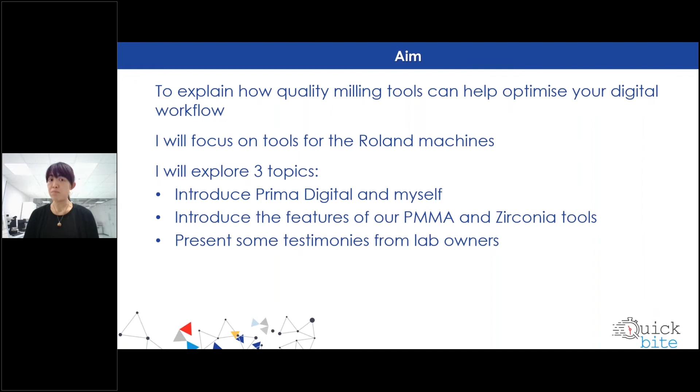This is only possible because we invest, especially in technology. In 2018, we built ourselves a new factory, and in no time, the factory is actually filled. I'm now today in the new factory. Our R&D facility, I'll show you later on when we finish this presentation, the facilities that we are in today.

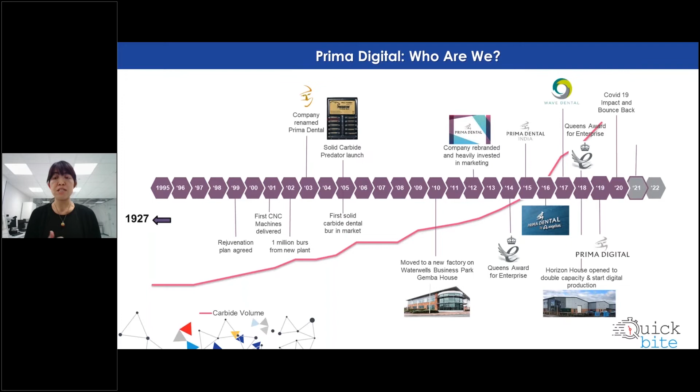This is myself, just a brief one. I completed a PhD in a UK university from the Engineering and Computer Science department. Then the very first job that I had was to lecture at the university. One of the topics that I lectured was machining.

Then I left academia and joined an engineering company. If you Google Sandvik, you will find this is a massive engineering company. There are many divisions, many companies under the headings of Sandvik. I was there designing tools in that division, and also I joined another division designing carbide. Now, we know carbide is a substrate of tool, therefore they are both related. So this knowledge has actually given me a lot of advantages joining Prima Dental.

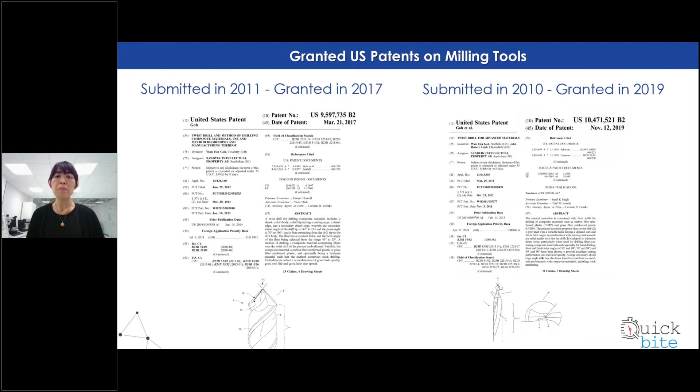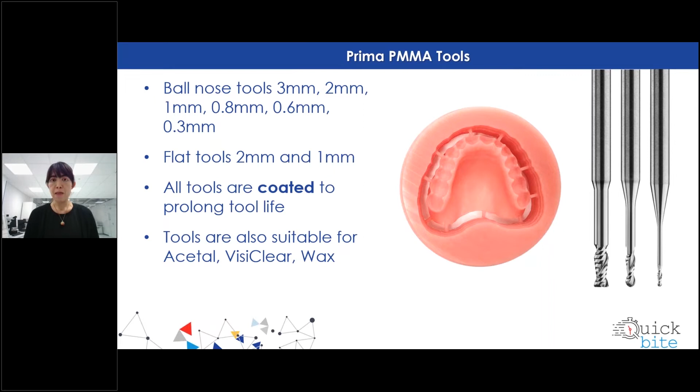When I was designing these PMMA tools, I was trying to gather information from the marketplace to see what we need to consider in this particular product. I can summarize it in 2 points. One, people say milling PMMA is very long. The other one, people were saying that vibration that they see when they're milling PMMA, especially in the desktop machine. We're talking about desktop machine here.

So when we design this tool, we look into the first issue, which is long milling time. Milling is the operation of removing materials. So you mill, you get rid of materials. Now 3D printing is adding materials, so there are 2 completely different operations, just to give you a contrast. In order to mill fast, sometimes it's cut fast, so we have to remove material fast. Now the way to remove fast is to rough the material out fast. So the roughing tool that you normally see in the marketplace is a 3mm toric tool.

And that's how we designed that 3mm toric tool to remove material fast. I'll explain later on how this is achieved. In order to address the issue of vibration, we also put into the 3mm tool certain features that can help minimize the vibrations. We also considered that this tool is used for the desktop machine. Of course you can use it on a large milling center, but it's designed so that it can reduce vibration in the desktop machine.

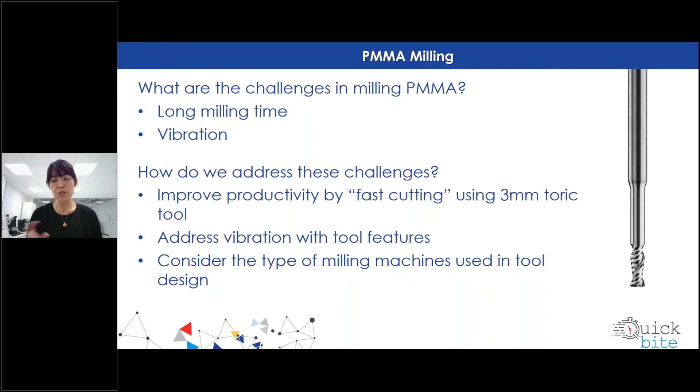So what is so special about this milling tool? If you look into tools in the marketplace, you can normally get a 1 flute tool for PMMA cutting. We have 2 flutes because we realized that when you put a 2 flute tool into the desktop machine - here in what we call a Roland machine - you can see the vibration cease. Compare it with 1 flute and you can see the difference yourself. Also, the 2 flute tool allows you to mill faster. I'll explain that in a minute.

We also treat our 2 flute tool, and also any other tools that we have for PMMA, on the edge because of the vibration that we get. So we treated the edge to make sure there's no chipping. We also put a coating on the tool for the benefit of long life - that is for the benefit of the end user.

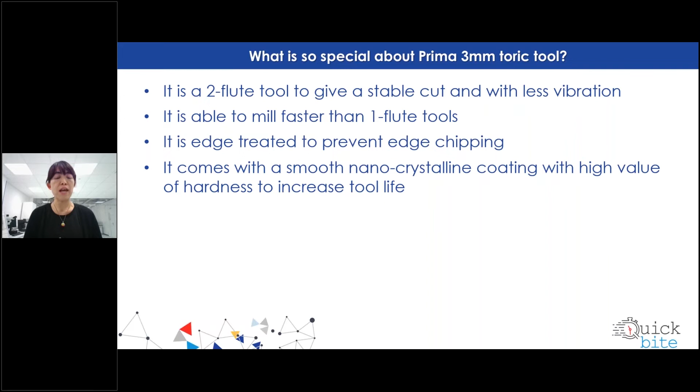Now we're talking about the tools milling fast. What does it mean? Suppose you go running today - if you want to reach a destination fast, what do you do? You run faster, of course you do. Likewise, you put it into milling tools - if you want to cut faster, what do you do? You feed faster. That normally comes to our mind, isn't it?

Suppose we go back to the running example. One thing you can do in running is take a big step. For people who are tall with long legs, you can take a big step. For people like me who are short, I can only take a small step. Maybe I can run fast but with small steps. Some people can run fast with big steps, right?

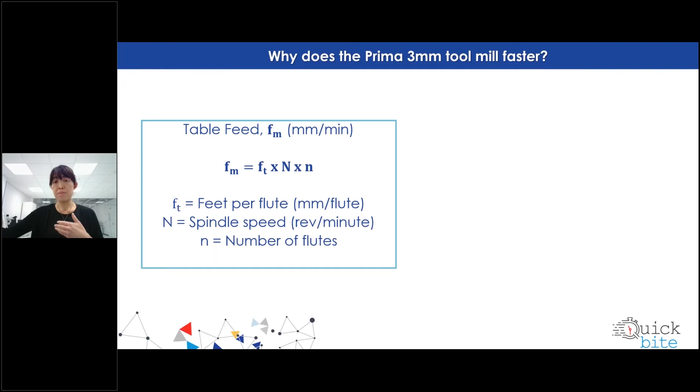So put it into milling similarly - we say milling is a material removal operation. The faster you remove material, which is the removal rate, the better it is. So if you're taking a bigger step, in engineering terms we call that depth of cut. You can do it in the horizontal direction, which is radial depth of cut, or in the vertical direction, which is axial depth of cut. A bigger step helps you finish your job quicker, mill off quicker, and go home faster, right? So material removal rate has 3 elements again.

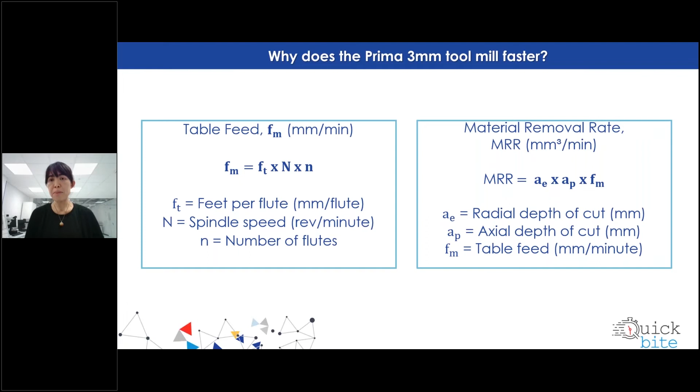The feed rate is only one of them. I'm not sure whether you've had the experience where you increase your feed rate, but when you look at the clock, the time isn't reducing. So you're thinking, okay, I'm actually feeding faster, but it's not reducing time, because there's more than one element within material removal rate. That's how we make use of the 3 elements to get our tools to mill faster - the depth of cut and the feed rate. We're not going into details of how we get these numbers, but this is how we allow our 3mm tool to mill faster.

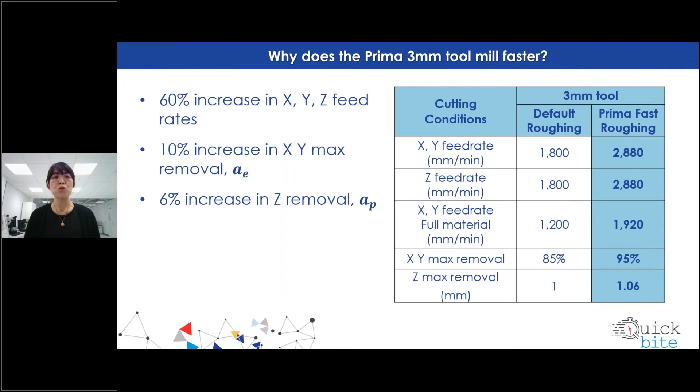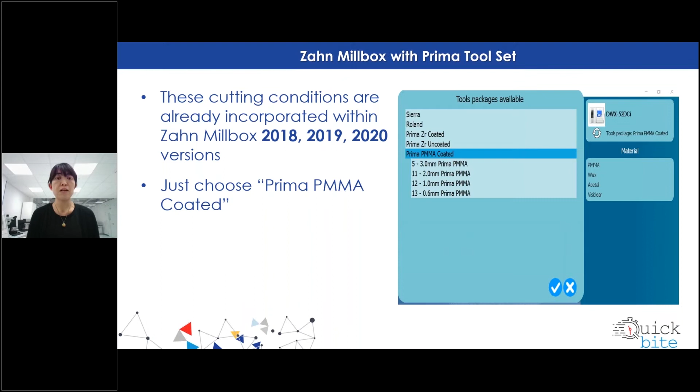If you are a Zahn customer, good news for you. These are already incorporated within the Zahn Millbox, so you don't need to remember what it is. If you have a Millbox, either the older version or the newer version, you just need to click under the tool package, and at the drop down, choose Prima tool. As simple as that. Very easy, no complication.

So what do we do to give an example of what it means by reducing time? We mill some bridges in here. I use a default cutting condition using our tool, so we milled it slower, and then we milled it fast also with improved cutting condition. The time is reduced by 17%, that is about 7 minutes. Now that 7 minutes would allow me to mill another bridge. So that is a time saving that you have here.

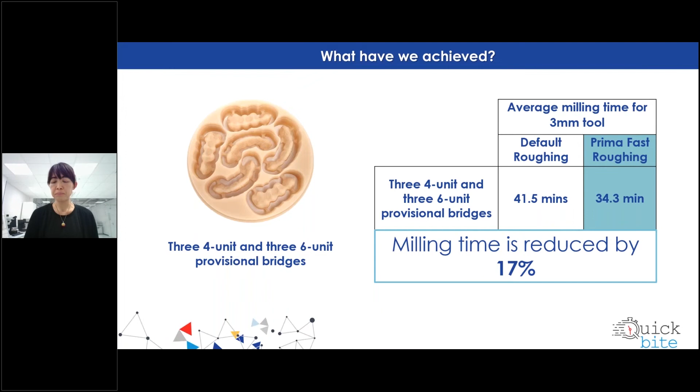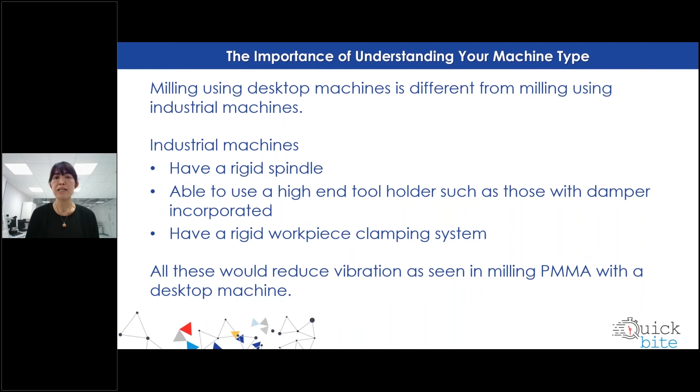We talk about understanding your machine being important because of the vibration. If I have to design this tool for a large milling machine, for example Haas in the US is very common, or DMG Mori Seiki, I would have designed the tool differently, because these will have a precision spindle, a holder that you can buy with a damper inside, so it reduces vibration and so on. So the tool can be designed differently. But this tool we have in mind is used a lot in the desktop machine, so we designed it to allow less vibration in the cut.

Why is vibration an important issue then? Because this is what you will see. If you take one of the tools in the marketplace, milled it 4 hours, you can see chipping on the edge already because of the vibration. So milling PMMA is not easy, I must say. So we design our tools, it goes up to 6 hours and it's still fine.

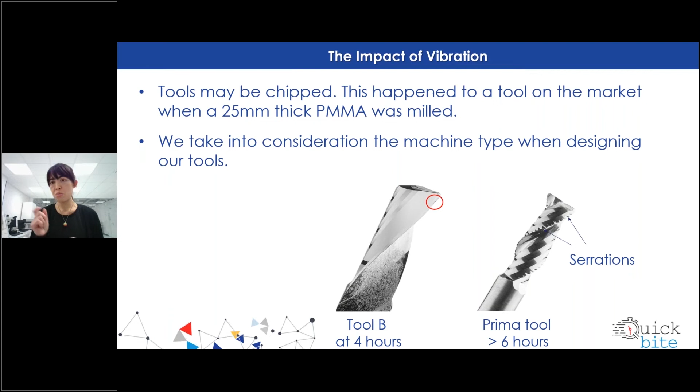Now I'm just pointing out all these are called serrations. They are not chips, they're serrations. Serrations are proven to be good to help for smoother cut and also for chip formation, so we can form smaller chips to allow better evacuation.

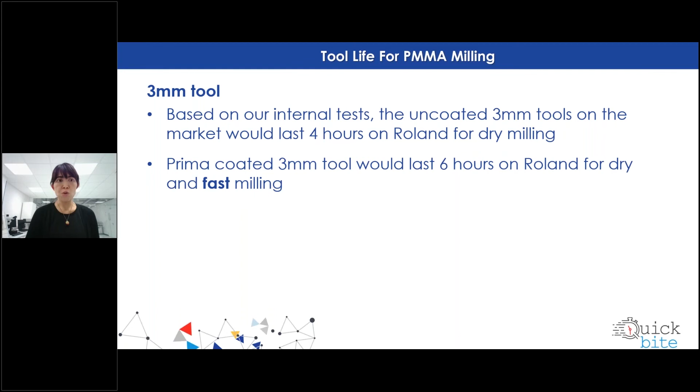Tool life, so you'll be asking, how long does it last? When using these 3 mil tools, the tools in the marketplace lasted 4 hours, ours will last 6 hours, and also fast milling. Remember, these are all dry milling, so if you're using it on a large milling center with coolant, it can last longer. But for dry milling, we know because of the heat, it reduces the tool life. Now for a smaller tool which are not used for roughing, we notice the recommended tool life for the larger tools in the marketplace is 7.5 hours. For the smaller tool it's 13 hours. Ours will last up to 40 hours.

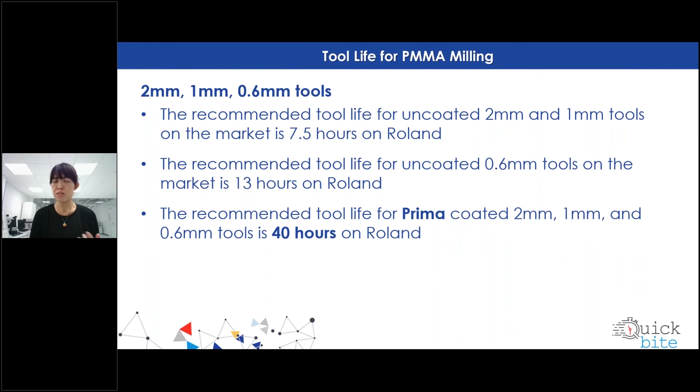Now you'll be asking, the 3 mil and the 2 mil, what's the difference? Why are the times so different? The answer is, remember, the 3 mil tool is removing much more material as compared to all these two added up together. So the tool is doing a lot of work. We use the 3 mil tool to get rid of most of the material before the 2 mil, 1 mil, and 0.6 mil can be used. It's cutting faster, doing more job, therefore the life is shorter.

Now, looking into our Zirconia tools, these are the tools that we launched 2 years back. These are the sizes you can get. For Zirconia tools, we offer both coated and uncoated, so you can choose which product you need, depending on the volume that you are milling.

I'm looking into the features. I'm just going to cover 2 features. One is precision, the other one is long lasting.

Again, if you are a Zahn customer, good news for you. Drop down, click on the tool package, you can see a drop down of tools that you can choose. If you have bought coated tools, choose Prima Zirconia coated. If you bought uncoated tools, choose Prima Zirconia uncoated. So it's very simple.

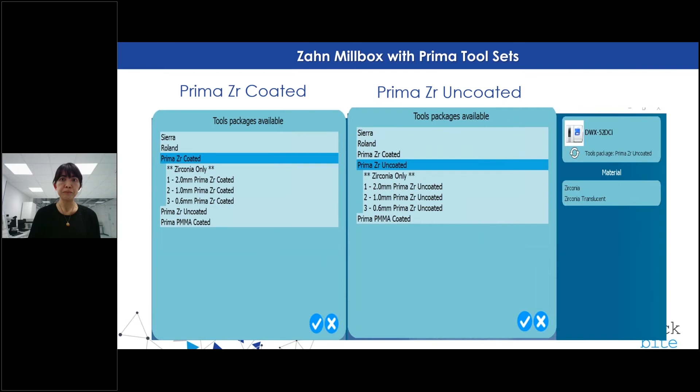What are the features there then for the uncoated tools? There are 3 main elements that I would like to share with you. The first one is the tool substrate.

We talk about hardness, so we use a harder carbide. Why hardness? Because hardness is related to wear resistance. If you want something long lasting, you choose something that's harder. For example, the hardest thing in the world is diamond - it lasts forever. But of course, we can't choose carbide that's too hard because it's also too brittle. Just like diamond, when you knock it, it will just chip. So 30% of hardness is what we found is good for this milling of Zirconia.

Then we also design a tool geometry to couple with it. So we realized a 3-flute tool is good as compared to 2-flute, as you can see in the marketplace for milling Zirconia. And we'll also look into other features such as the relief angle and so on and so forth.

Now that we have the tool substrate and the geometry, the next thing we have to make sure is that we manufacture it to a good tolerance. We are using an ISO standard to make sure that our tool falls into those standards. It might not mean anything to you, but we actually conform ourselves to this standard.

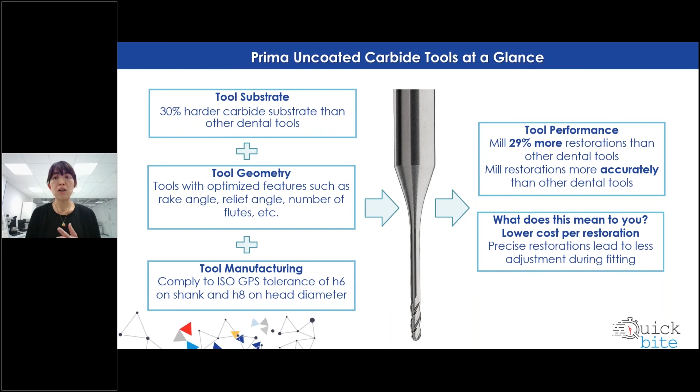So at the end, what does this mean to you? If the tool lasts longer, if it's able to mill more accurately, it means that you have less time remilling your restorations. It also means that you have a lower cost per restoration.

Looking into the precision, we did an analysis with a university in London. I performed all the milling in-house, using 3 sets of tools - of course Prima tool is one set, and 2 other tools that I found in the marketplace. I performed the milling and sent the restorations out to the university without telling them which brand they were, so they performed the analysis for us.

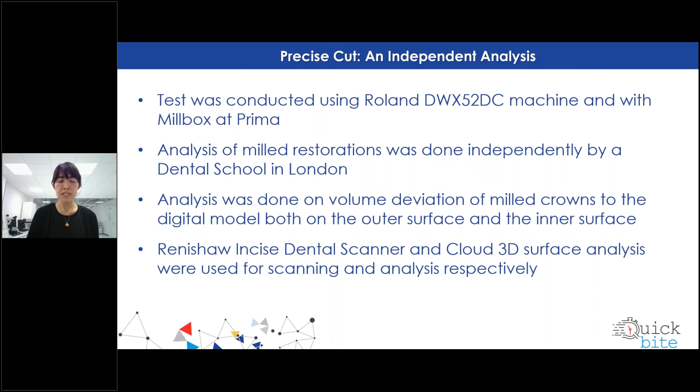What they do is they scanned the restorations - the Prima one and the other 2 tools - and then compared it with the digital model. The digital model is the model that I mill my restoration based on, so that will be our reference or our target. The university is comparing the scan against the target.

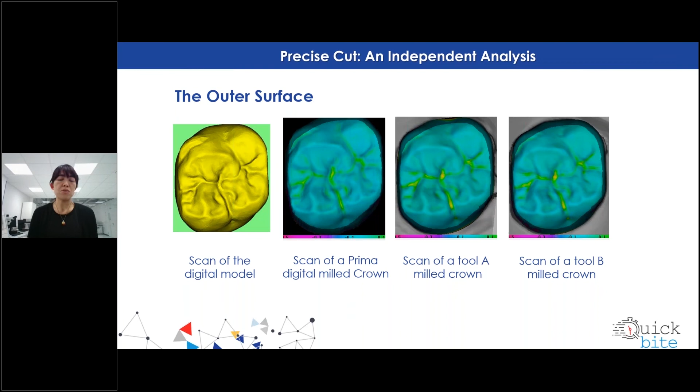From these images, by our naked eyes, we can't judge which one's better, isn't it? So we need some sort of calculation to help us. Looking into the last column on the right, that is the deviation, the total volume deviation. Deviation means further away from the target, so therefore we want a smaller value - the smaller the value, the better it is.

In this case, you can see the Prima tool is able to mill more discs - 9 discs, as you can see, versus the other ones at 7 each before the tool worn. The tool is also able to mill more precisely, which means with less deviation. So if we look at the number of crowns that we mill, these are the number of crowns, and this is the number that we get in a lot of flyers that you can see - 29%. This is how we get the number.

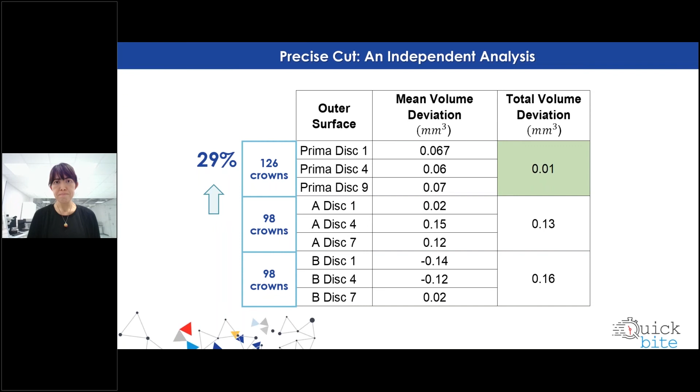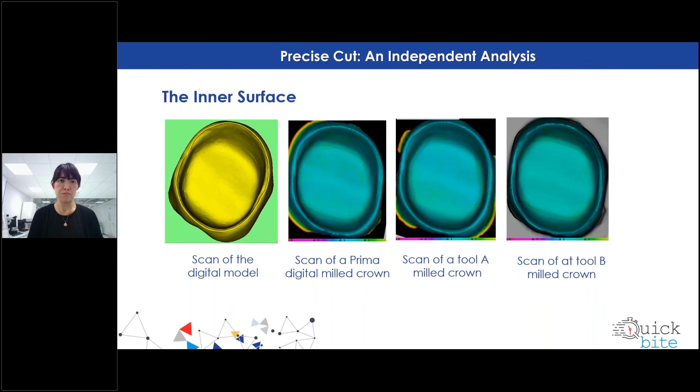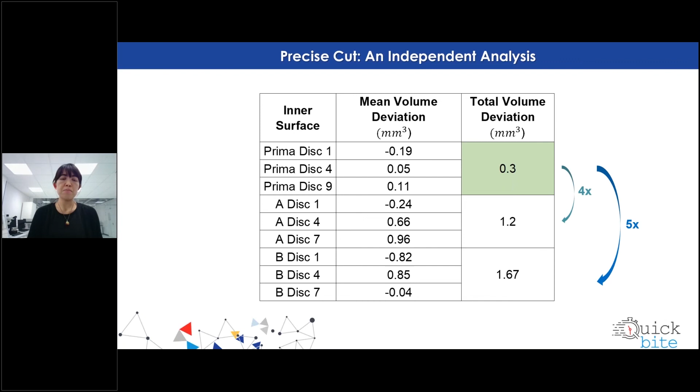Also, the university did an analysis on the inner surface, which is actually very important because that is the fit. Again, we need some sort of numbers to show us what it is - the lower the deviation value, the total volume deviation, the better it is. Again, Prima stands out here. If we analyze it from a different angle, we can say it's 4 times better or 5 times better than the competitor.

Looking into our diamond coated tools, what is good about our diamond coated tools? The first one again is the substrate. Now that I'm going to put a coating on the tool, the substrate hardness is no longer an issue, because it's not the substrate that is doing the job.

It's the coating. Therefore, now I need to make sure that the diamond adhesion to the tool substrate is good. Not all carbide is a good friend of diamond, so we need to choose a good carbide that can work with diamond. That is a very important point, otherwise you will see the diamond flaking off the tool, which I see a lot, unfortunately, in the marketplace. The other thing is we put a coating on top of the substrate.

Now this coating that we use is CVD diamond coating - it's as hard as a natural diamond that you can find. And lastly, we make sure that we manufacture to a tolerance, to ISO tolerance.

Now, what does this mean to you then, all this? Of course, for the diamond coated tools, it will last much longer, which means that your cost per restoration drops significantly. So if you are having a large volume to mill day to day, a diamond coated tool would suit your digital workflow.

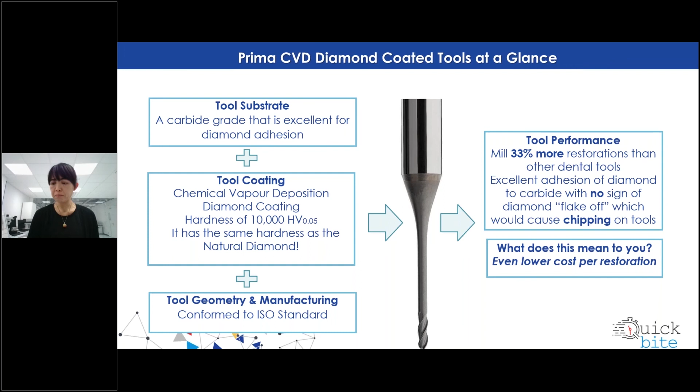So we wanted to know how long this tool can run. So we did a marathon, milling and milling to see how long it will last. I used 3 sets of tools - Prima is one, and then 2 other competitors - to perform the test.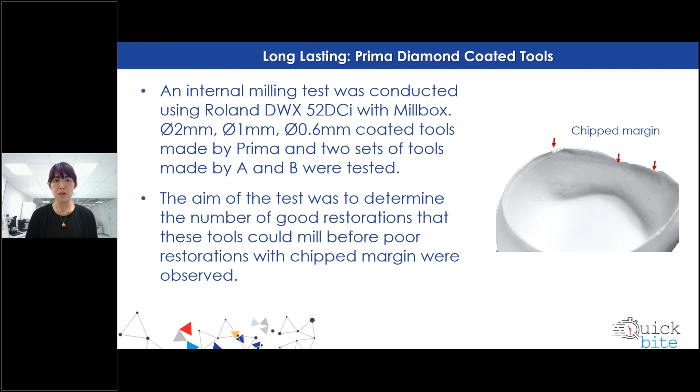So this is what I get - 33% better. I would say you can go far beyond 33. Okay, this is just a reserve number.

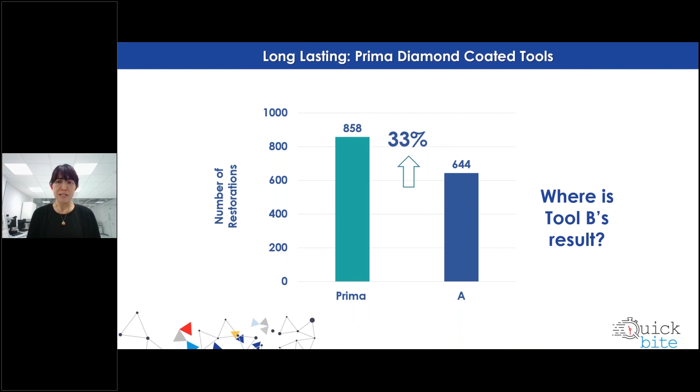We said we actually tested 3 sets of tools, but there's only 2 tools being plotted here. So one is missing. Why is that? Because I did not finish the test. I tested the first tool, 28 crowns, I got a chip. I thought, okay, I'll test another one, 56, I got another chip. I was like, I'm not going to continue. I don't want any hassles on my spindle. Changing the spindle is more expensive than buying new tools.

So if you do not want issues like that, Prima Dental will be your choice.

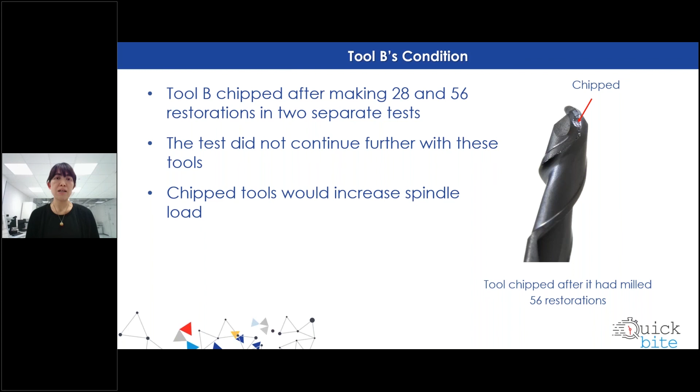Now he also mentioned our R&D department. So we are not just a manufacturer, we also design in-house. You can see behind me, that's the machine we use to make our tools in the R&D department - this is just for R&D use. And you can also see all these machines I have here to analyze the tool.

The other testimony we get is from a lab owner in New York City. I was talking to him, he was funny. I said, tell me, how long does the tool last? He said, oh, very long. I said, how long? He said, I can't remember because it keeps going. But that's a good thing - at least 200 hours. It's good, he said keep going. He lost count, which is interesting. It's good to hear that.

He was also saying that he doesn't need to change his mill as often, and he doesn't find any chipping on the margin, so he doesn't need to remill. So I think those are great testimony for us, really.